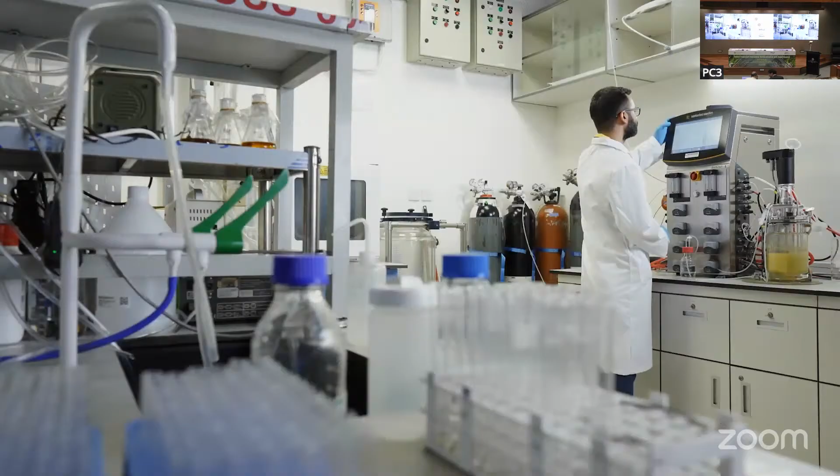PAIR is composed of multiple constituent research institutes and research centers. Each research unit focuses on a particular research area and is joined by researchers from various PolyU faculties, schools, and departments. PAIR research areas include advanced technologies and manufacturing, good health and well-being, and smart and sustainable cities.

PAIR researchers develop new materials, systems, technologies, and techniques that support industrial modernization, upgrading, and transformation. They look into the factors and mechanisms influencing human health and wellness and develop evidence-based solutions, and generate smart technology-based solutions for making urban operations and services more efficient, connected, and eco-friendly.

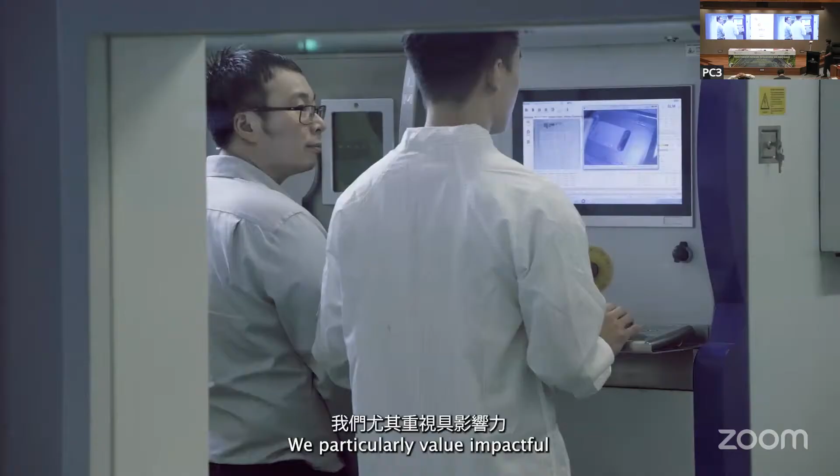We particularly value impactful collaborative activities in research and scholarship. PAIR researchers pursue research collaboration at different levels. In addition to interdisciplinary collaborations within and between research units, PAIR and its units establish partnerships with industries, governmental bodies, universities, and other external stakeholders.

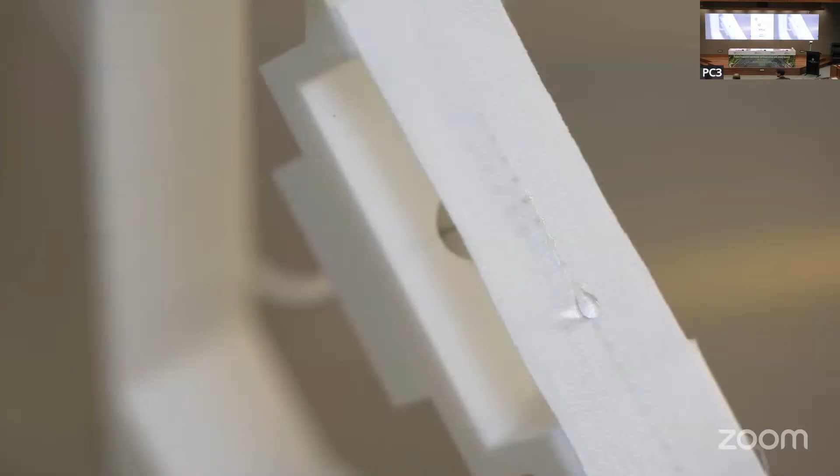With internal and external collaborations, we have successfully translated PAIR-led innovations into commercializable solutions and practical applications, and established joint laboratories and research entities with external organizations, driving scientific breakthroughs, innovation and technology development, and socioeconomic prosperity.

PAIR's research excellence and research impact have been widely recognized at local, regional, and international levels. Our research outcomes have been published in leading journals, including Nature and Science. Innovations led by PAIR researchers have won prizes at various competitions and events, including the International Exhibition of Inventions Geneva.

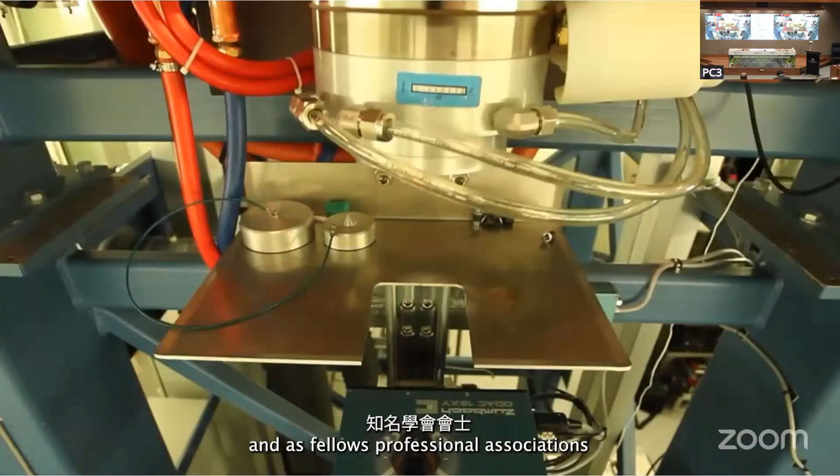Many PAIR researchers have been named among the world's top 2% most cited scientists in their own areas of specialty. Individual researchers have been selected to the National Academies of Science or Engineering and as fellows of professional associations, and have been bestowed with local, national, and international awards and honors.

Harnessing the strengths of PolyU's research and world-class scholars, PAIR will continue our unwavering efforts in research and scholarship, knowledge transfer, and collaboration to develop impactful solutions that benefit Hong Kong, the nation, and the world.

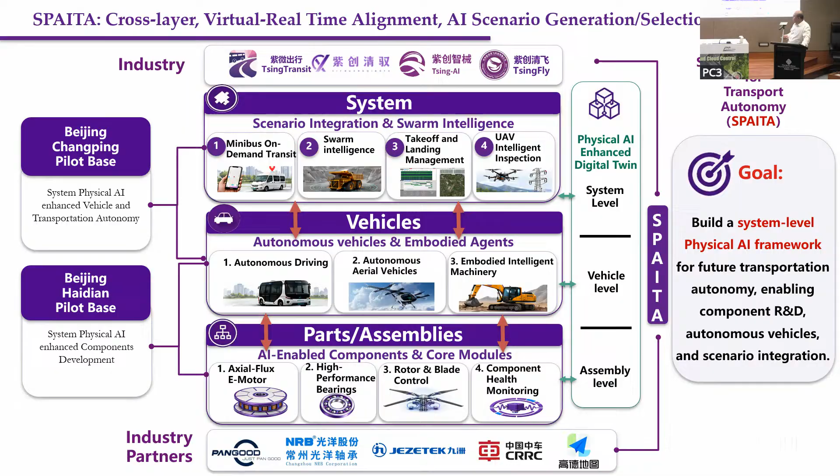And that's a single vehicle level. If we have multiple vehicles working together, that's swarm intelligence, that's the system level. This is the logic for the research group, the theme of the research group.

Back to today's topic, I will start with a more general picture regarding the most fundamental problem of urban mobility system. The most fundamental problem is the asymmetry or imbalance between the demand and supply.

Because demand is changing all the time, we have morning peak hour with a lot of traffic, afternoon peak hour, and low demand period during night. But supply will be provided by infrastructure plus a combination of infrastructure, cloud, and the vehicles.

So during the morning peak, there's a lot of traffic. If we want to accommodate that traffic, and if cloud computing is not enough, we can allocate more resources, more computing resources during the morning peak. That's not a problem. If we are lacking vehicles, we can allocate more vehicles because a lot of vehicles are currently parking in the car parks.

But for the infrastructure, it's rigid. There is nothing we can do. During the morning peak, we need 5 traffic lanes to accommodate the traffic, but that's not possible. If you have 2 traffic lanes, that's 2 traffic lanes - it's not possible to convert them in real time to 5 traffic lanes.

So accordingly... page 5 or page 6? Yeah.

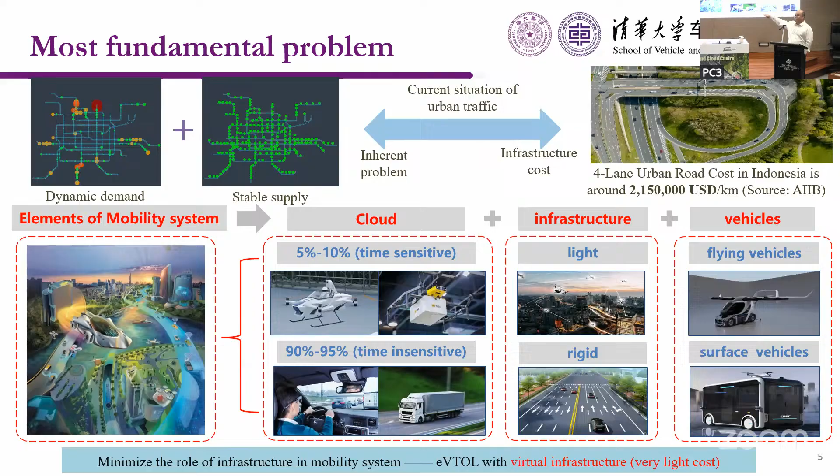Accordingly, throughout the past 30, 40 years of intelligent transportation systems, what we are going to do is minimize the role of infrastructure and enhance the role of cloud and vehicles. Over the past 20, 30 years of intelligent transportation system development, we always wish to minimize the role of infrastructure because infrastructure is rigid, and we want to enhance the role of vehicles and the cloud.

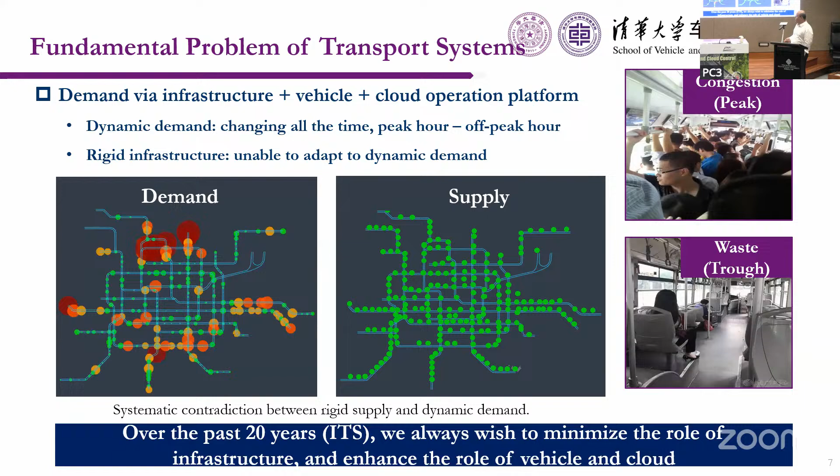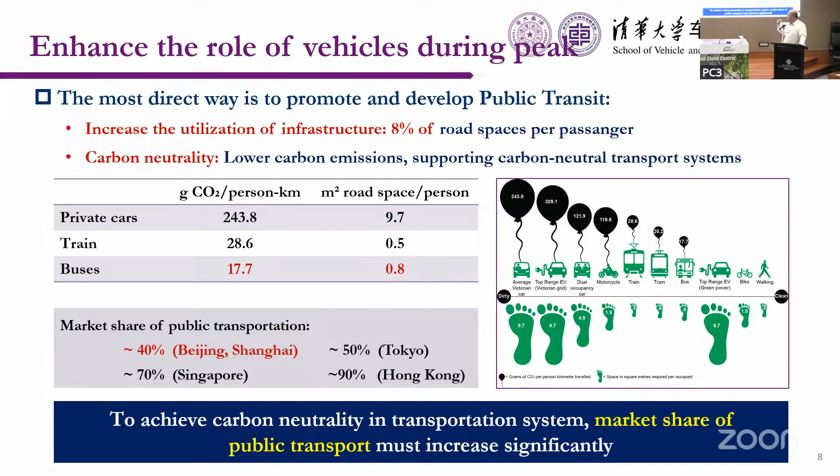But our current public transport system suffers from a few drawbacks. Number one is a very long journey time, because we need to stop at each and every station, even if nobody is alighting or boarding. And in order to cover a big range of area, we increase the nonlinear coefficient of the bus route.

The second issue is transfer. According to our data in Beijing, 41% of trips need a transfer to complete the journey. And for each transfer, it takes an average of 11 minutes, because for the transfer you need to stop, get off, maybe change to another platform, and wait for the connecting bus - a long and uncertain time. So accordingly, we need to improve the current practice in order to increase the market share.

Basically, what we are doing for the first study is to develop a smart brain, the cloud system, in order to have the benefit of both traditional public transport and also the ride sourcing platform. Our best hope is to have a transportation mode with a travel time similar to a taxi, point-to-point, while its cost, carbon rate, and burden to infrastructure is comparable to a traditional bus, by using a smart cloud operational platform.

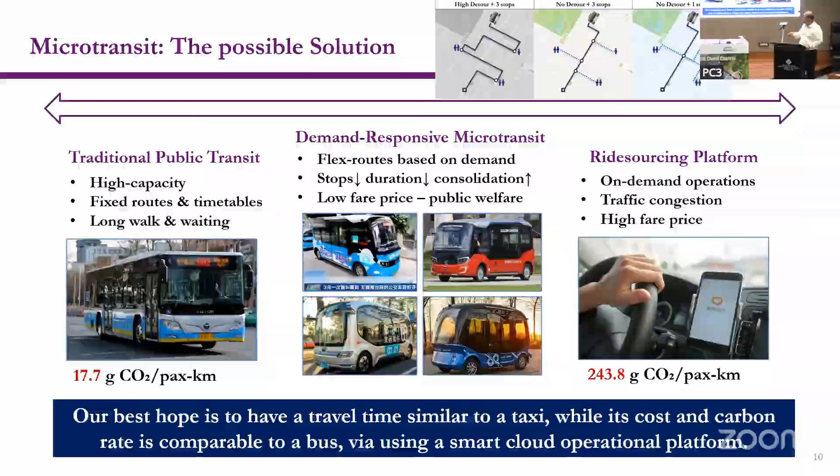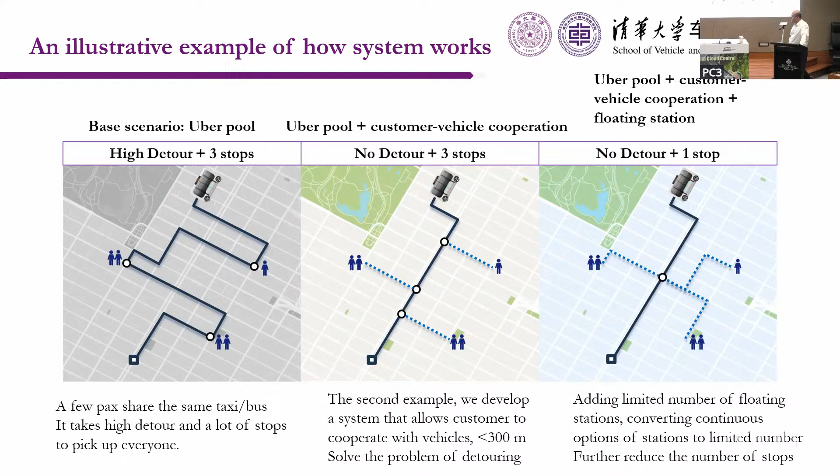The second idea is to allocate floating stations to gather passengers nearby in order to minimize the number of stops from 3 to 1, based on this example.

There are three components of this demand responsive microtransit. Module one is network design: how many floating stations in a zone and the optimal locations of each floating station. Floating station means you can only board and alight at any of those floating stations.

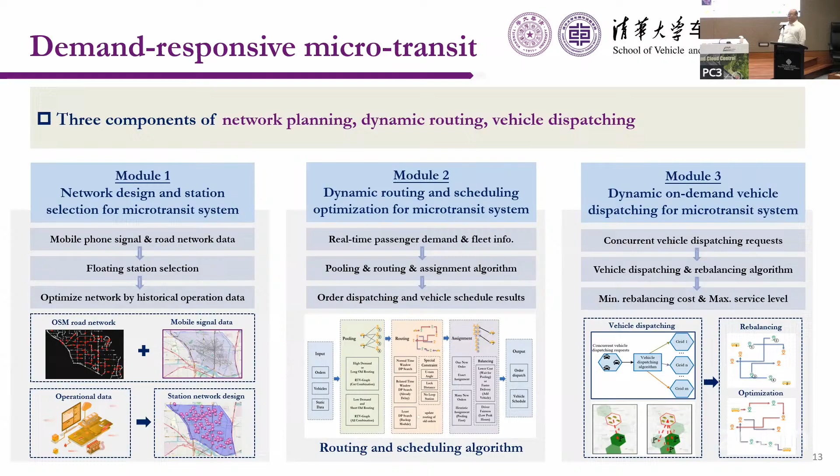The first one is vehicle customer coordination. We allow the customer to walk a little bit to the floating station, and based on the optimal calculation, the optimization, we allocate the second one, the dynamic flexible routing for each and every journey.

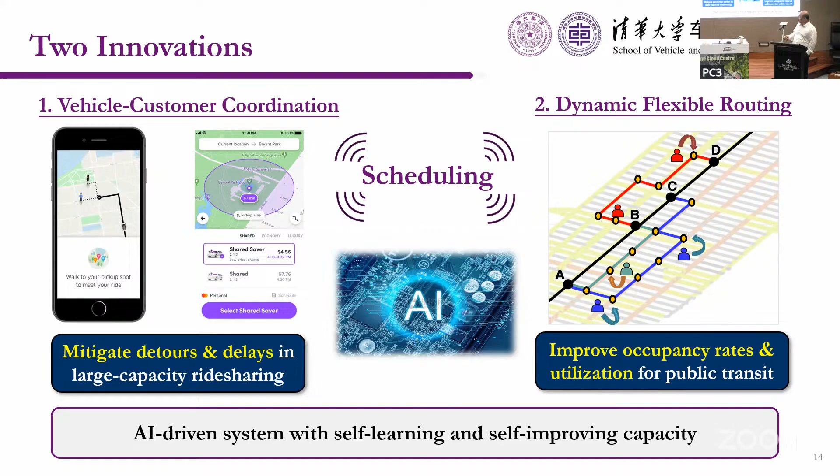For the user end, we submit the request, the origin or destination, final destination, or current location. On the driver end, we have the optimal plan, locationing information, speed information, and vehicle dynamic information sent to the cloud, so the smart brain can calculate the best possible route, position, and passenger route from their current location to the floating station.

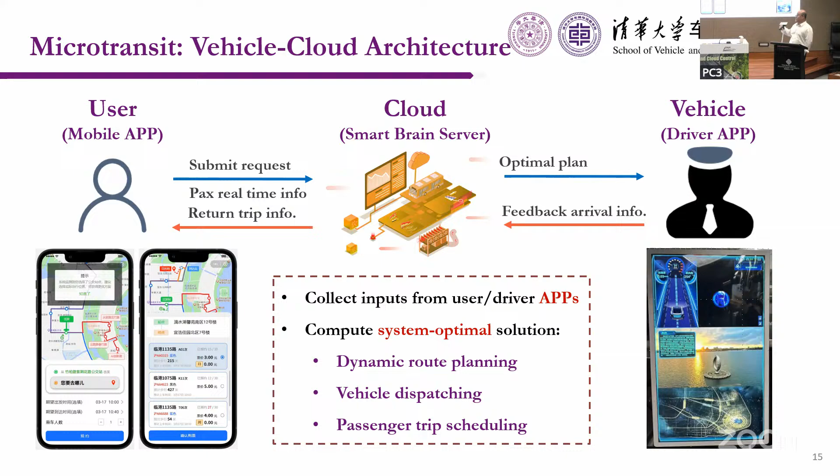The logical architecture has interfaces between the user end, smart brain, and the driver end. From smart brain, we develop the user app and the vehicle app.

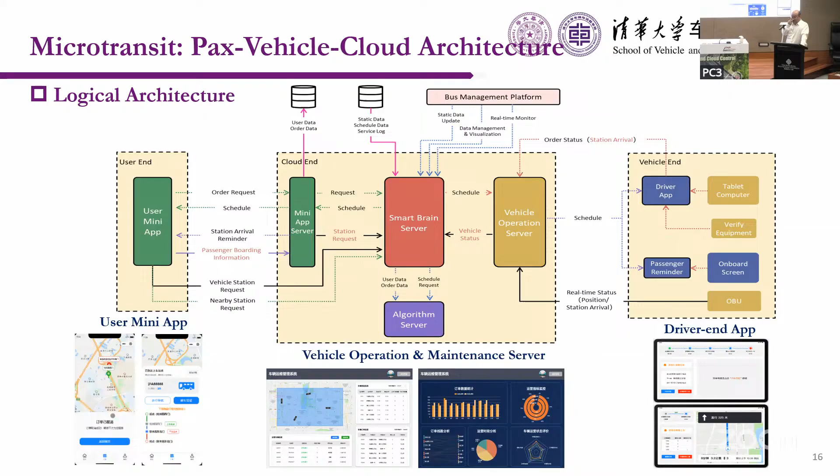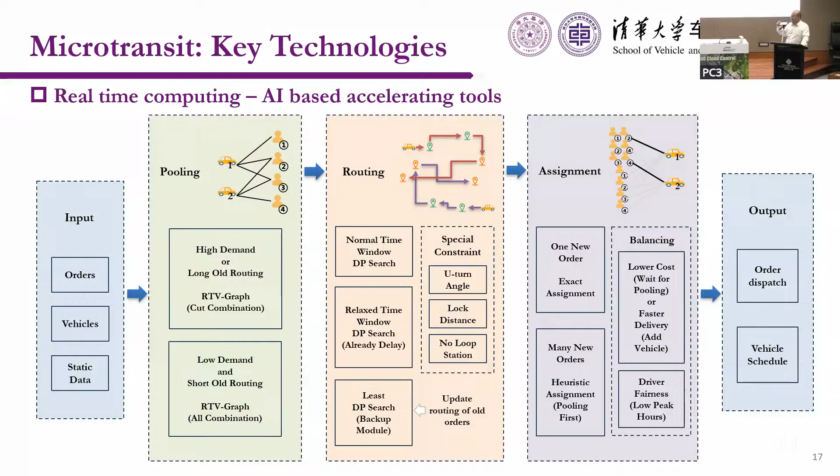We use a lot of AI tools to accelerate the calculation because this is a very complicated problem. We have a lot of pre-training in order to get calculation results in real time.

We developed the algorithm in collaboration with Professor Wang. It's a large-scale online optimization problem. We reduced the computation time to only 5% in comparison to the commercial solvers.

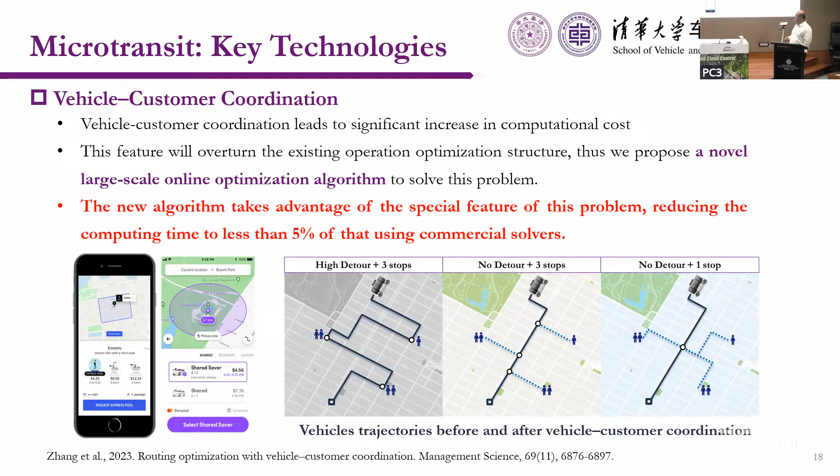At the end, every 10 seconds we can update the plan, and every 1 second we have the calculation result, which allows real-time computation.

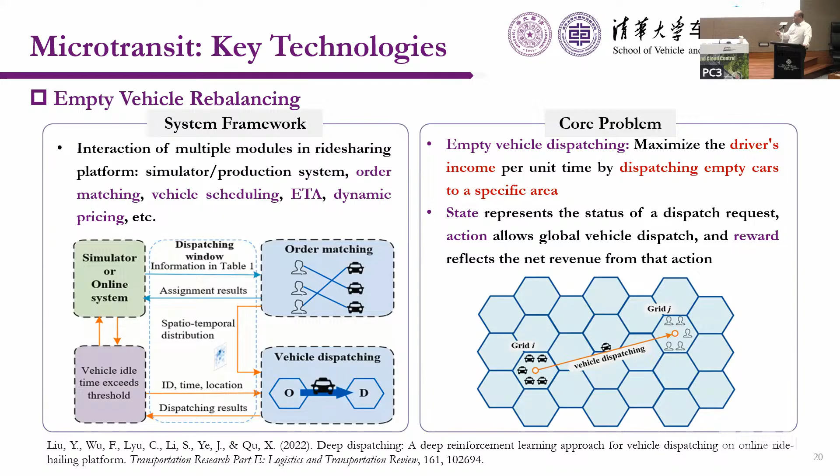And this is the optimal redeployment from one zone to another zone problem. Basically, the system has been deployed in Zhuzhou City, Hunan Province, for the first place. It has been running for 18 months already.

In the past 6 months, we collected data to evaluate the performance. Basically, our demand responsive public transport system's travel time is only 20%, 21% higher in comparison to a taxi, from floating station to another floating station. Only 21% higher, that is comparable to a ride-sourcing system.

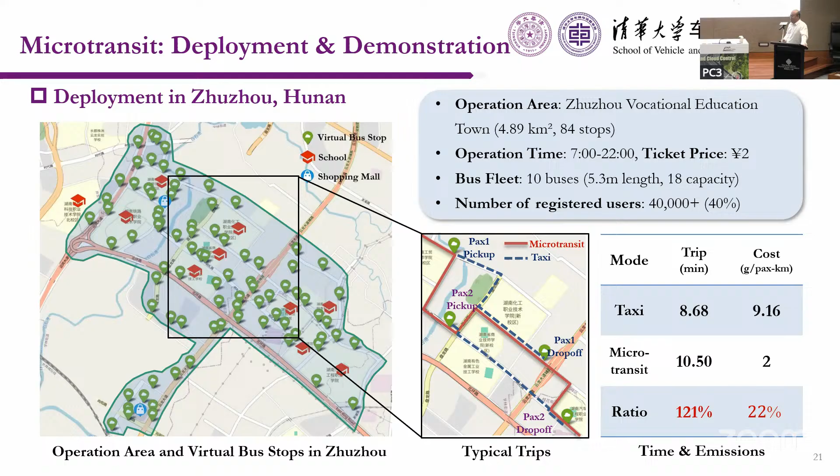But the cost by using taxi is 9.16 Chinese yuan, and we only collect 2 Chinese yuan, it's only 20%. If you calculate the carbon footprint and the burden to infrastructure, we are much lower, like 20% or even less.

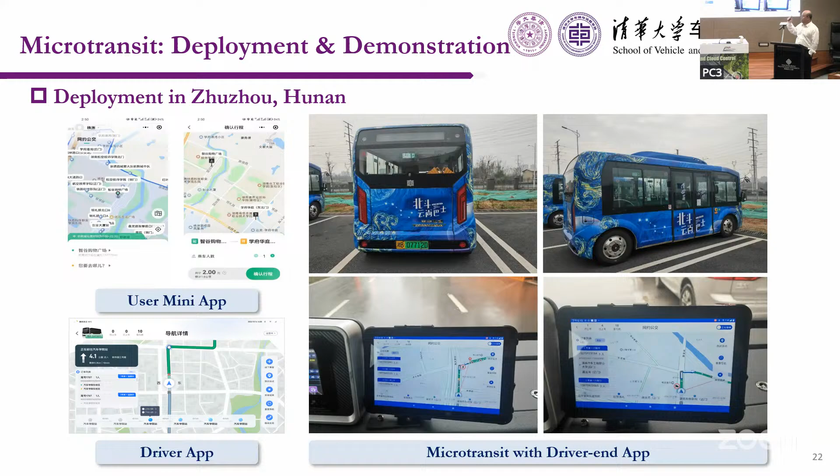We are using buses manufactured by CRRC, one of the largest vehicle and bus van manufacturers in the world. We developed the user app, the driver app, and we use Beidou for positioning purposes.

Because we have a strong benefit in cost, with cost benefit and travel time comparable accordingly, we gain a substantial amount of market share from the taxi industry.

According to our real data for this demonstration zone, the number of DiDi and AMAP services has reduced by 40% after launch of our system, and the daily revenue has increased.

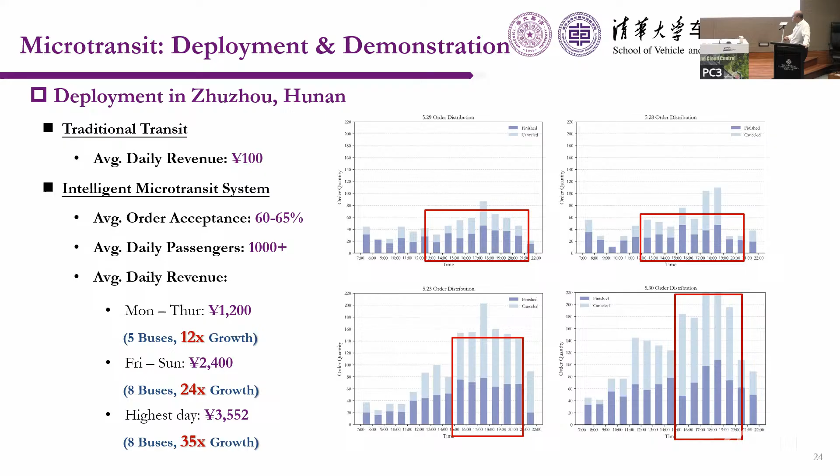Daily revenue increased 12 times during the weekday, 24 times during the weekend, and the highest day 35 times, which allows a positive business model for the public transport operators.

After that, we have been deployed in another 5 cities in China, and in the following year, in collaboration with King Long, Xiamen King Long bus manufacturer, and also CRRC, we are going to deploy in another 20 cities.

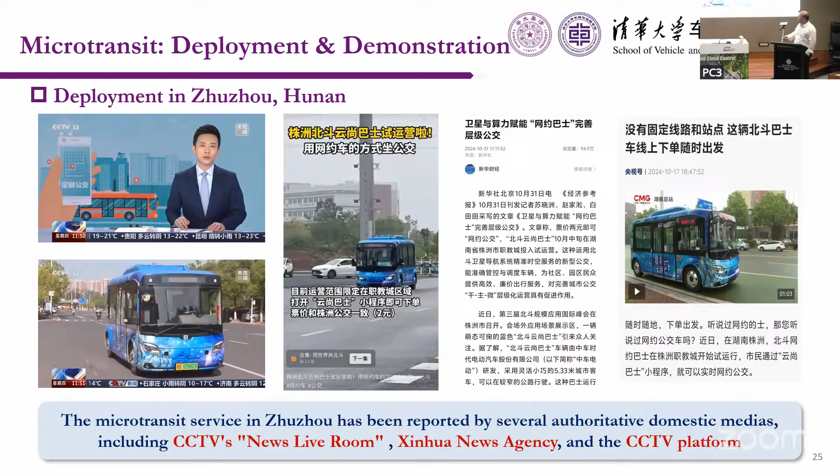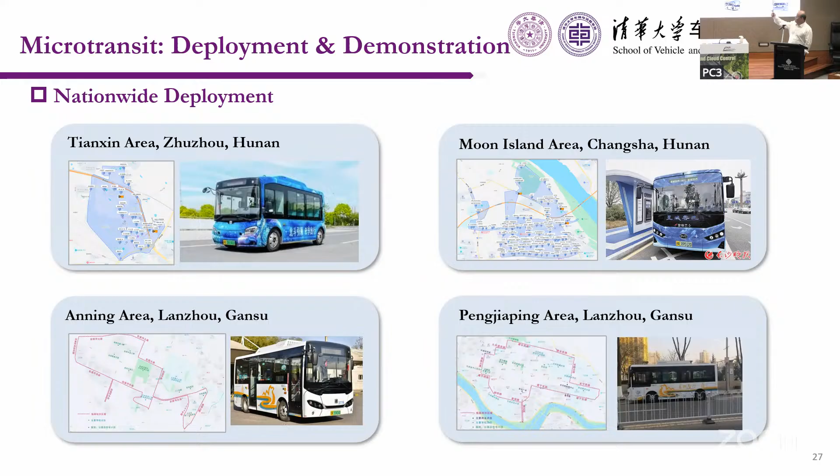It was reported by CCTV and a few domestic news outlets. Several other places have been launched in the past 6 months - this is number 2, number 3, number 4, number 6, and number 5.

Okay, for the first case study, basically what we are doing is to increase the role of cloud.

So remember, for the mobility system, the supply will be provided by infrastructure, cloud, and vehicles. For the first case study, we increased the role of cloud in order to make our transportation system better.

The second case study, we are going to use autonomous driving technologies to develop new types of vehicles. It's something in between passenger vehicles, or a minibus, and a train, in order to enjoy the benefit of both and increase our capacity. The second example, we are developing new types of vehicles.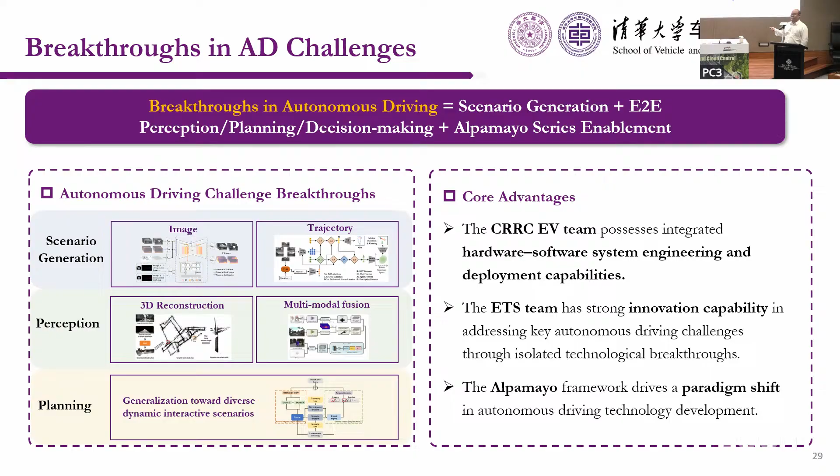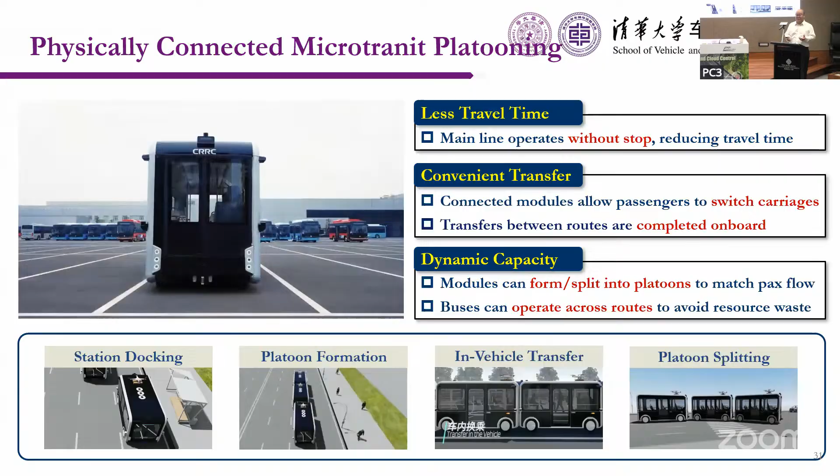We have done a lot of work for autonomous driving based on scenario generation and end-to-end vision language action models. In that process, we developed a technology for very precise control. We allow the vehicles to be connected and disconnected while in motion, like what we have done for this vehicle, the first three ones.

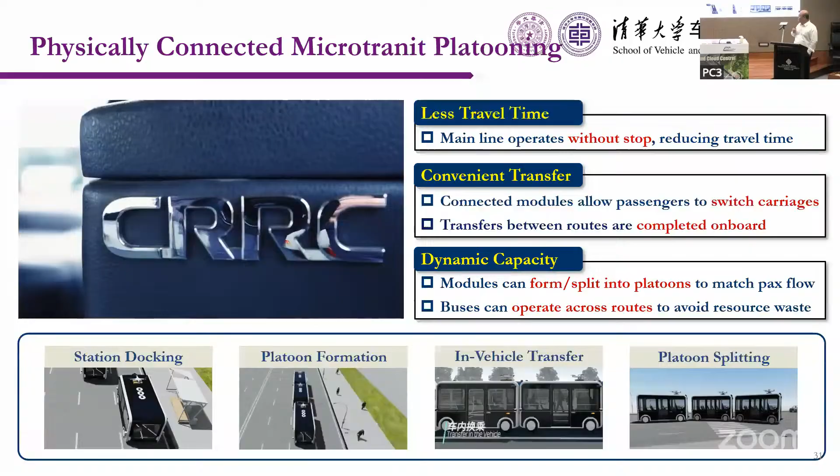This is also a collaboration with CRRC. Basically, the vehicles can be connected while in motion, and disconnected while in motion. Accordingly, if somebody wants to get off, you can transfer to the last cabin by using the autonomous driving technology to get rid of the last cabin.

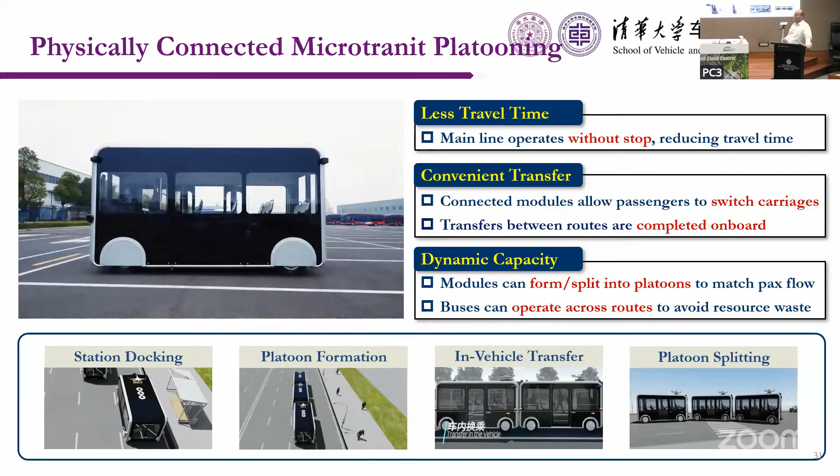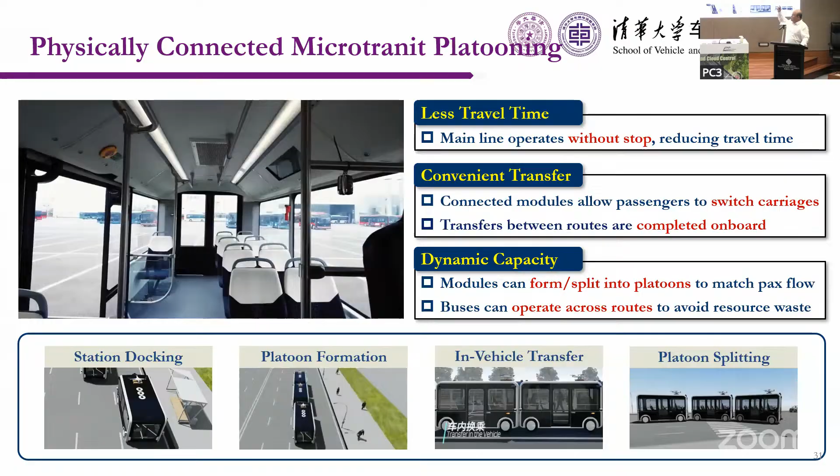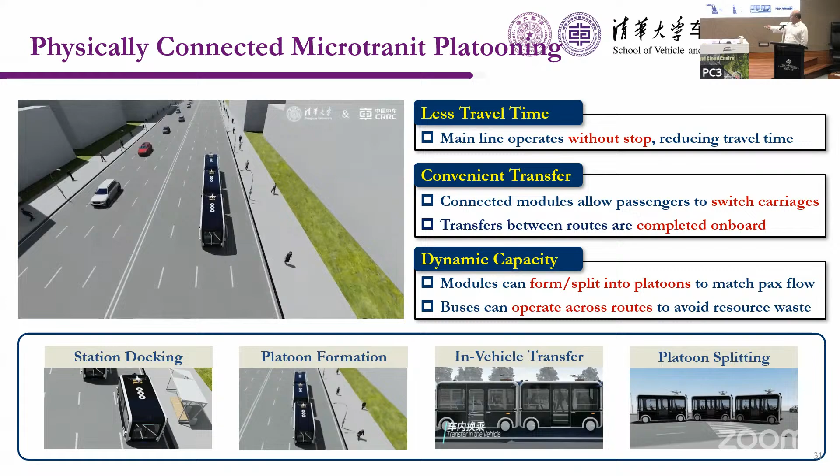The last cabin can use the demand responsive model, as I introduced just now, to distribute and collect new passengers. Accordingly, from one zone to another, you never need to stop. It's a train system, you never need to stop. Only if somebody arrives near the final destination do you transfer to the last cabin, then get rid of it using the demand responsive technology to distribute passengers and collect new ones. This is like what this diagram is showing.

From origin to destination, only the first several kilometers and the last several kilometers have some stops. Anything in between, never stop. When you arrive at your final destination, you transfer all the alighting passengers to the last cabin using autonomous driving technologies, get rid of the last cabin, and use the demand responsive model to distribute those passengers alighting and boarding.

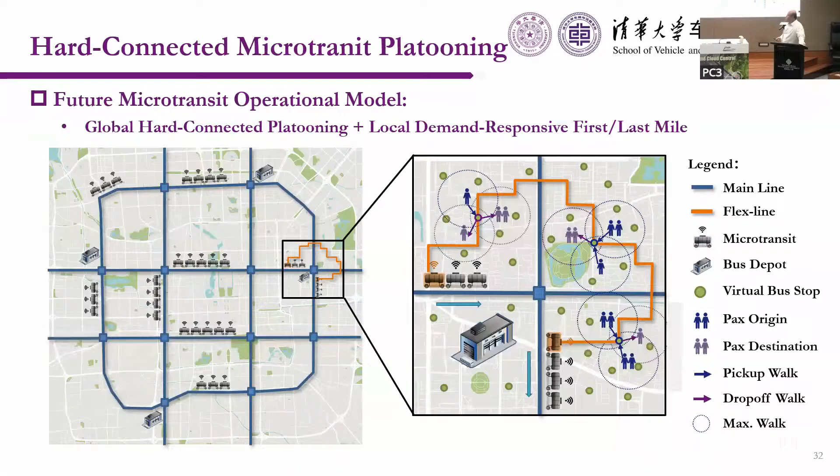You can use the demand responsive model to calculate the floating stations, so you only need to stop 3 times. The first time, 3 passengers get off and 1 boards. At the second floating station, 2 alighting passengers and 3 boarding. At the third floating station, 1 alighting passenger and 4 boarding. As soon as you collect all those passengers, you arrive at the main corridor and connect to the train system.

So the second example is basically we develop new types of vehicles for increasing future infrastructure capacity. Accordingly, the role of vehicles will be enhanced, and the relative role of infrastructure will be minimized.

So the third example is basically the ultimate solution. As I introduced just now, we have an urban mobility system where the supply is provided by cloud, infrastructure, and vehicles. We want to minimize the role of infrastructure. So which type of transportation mode has the lowest requirement for infrastructure?

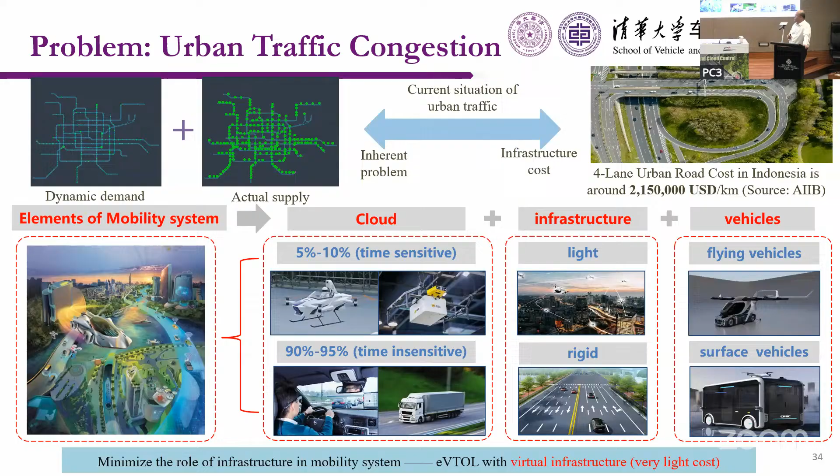That's flying, right? Because for flying, it's a route from one location to another, we do not need to construct physical infrastructure, we only need a virtual route, an air route. So accordingly, urban aerial mobility leverages virtual air route networks to reshape resource allocation, overcoming the physical constraints of traditional infrastructure.

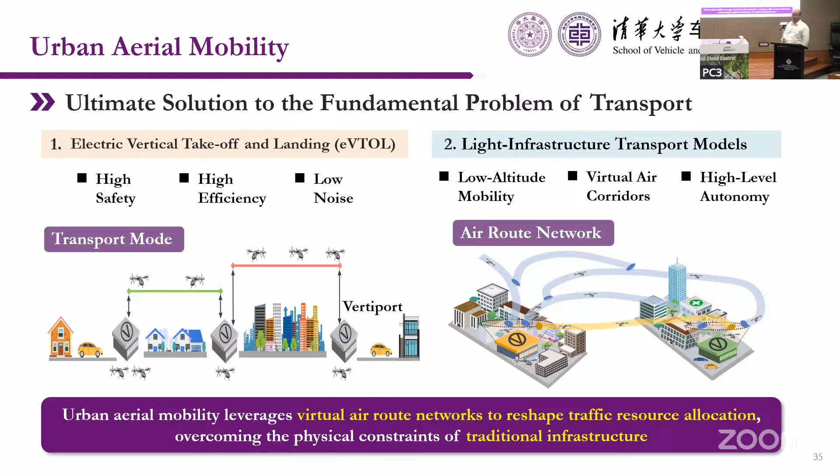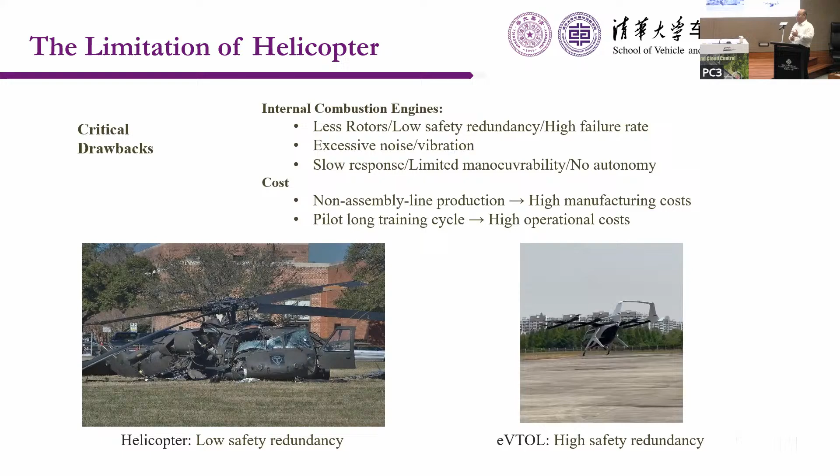However, low altitude flying is not new. In 1939, we already had helicopters, but helicopters never became a mainstream choice for commuting. At the moment in China, such a large country, we only have 800 civilian-used helicopters. Why only 800? It's not an industry at all.

Why? Because you only have 1 propeller, you only have 1 engine. So the reliability level needs to be as high as 10 to the power minus 7, 10 to the power minus 8. You only have 1 propeller, 1 engine, so the system reliability equals the parts reliability.

Thanks to the recent development of electric vehicles, we now have distributed control. Take a look at our flying vehicle. For this example, we have 8 rotors. For each rotor, we have 1 electronic motor, and they are running independently, with distributed control.

Accordingly, even if one of them is not working—you see the second row, the third one is not working right now, I turn it off—we can still maintain stability and safe landing. Accordingly, there is a big difference between the parts reliability and the system reliability.

So accordingly, if we can accommodate two malfunctions, that means the reliability level for the rotor for the electronic motor can be reduced from 10 to the power minus 7 to 10 to the power minus 3. That's vehicle level, that's a surface vehicle level, not the aircraft level.

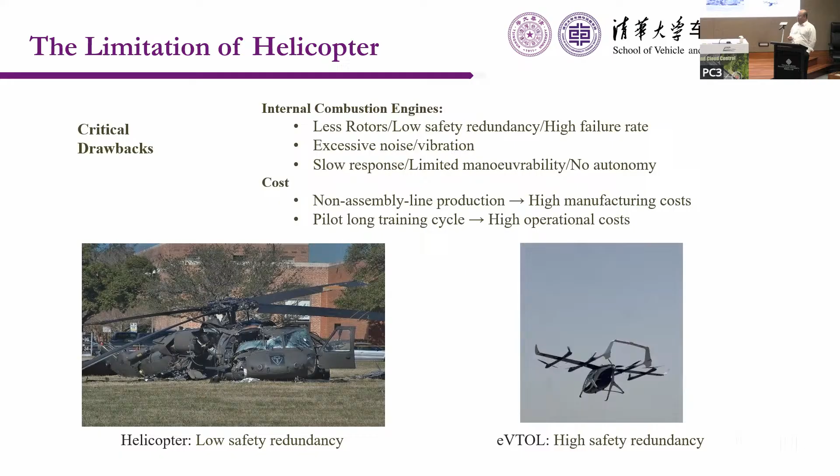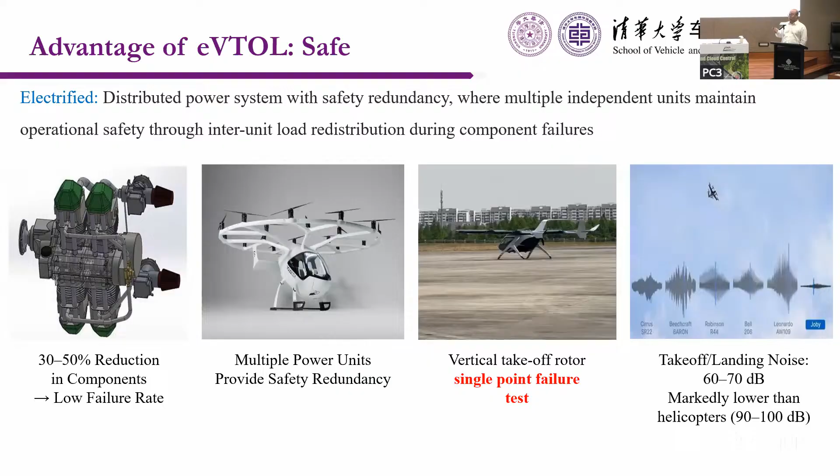If we can use the supply chain system of electrical vehicles, the cost will be much lower, only 5%, 1/20th of an aircraft or a helicopter. Because we have electrified distributed control, we can use the supply chain of the vehicle industry to significantly reduce the cost to only 5% of a helicopter.

According to the estimation by BCG and Roland Berger, for two-seater or three-seater flying vehicles, the cost will be reduced to $200,000 to $300,000 US, or according to other estimation, 500,000 to 1 million Chinese yuan per flying vehicle, if we use the supply chain of electrical vehicles and assembly lines instead of customized design.

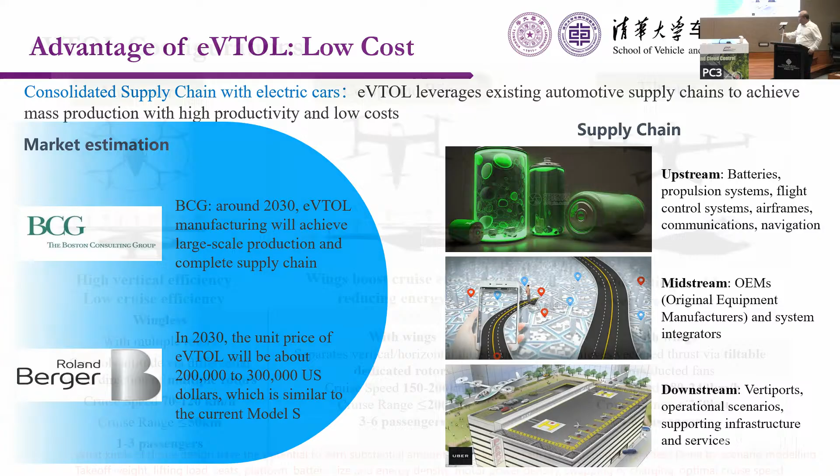However, at the moment we have over 800 different configurations of flying vehicles in the world, and in the end we may only have 5 or 6 that can be useful for our current market. How do we convert the 800 different configurations to 5 or 6? What kind of drone design or flying vehicle design has the potential to gain substantial market share from our surface commuting services?

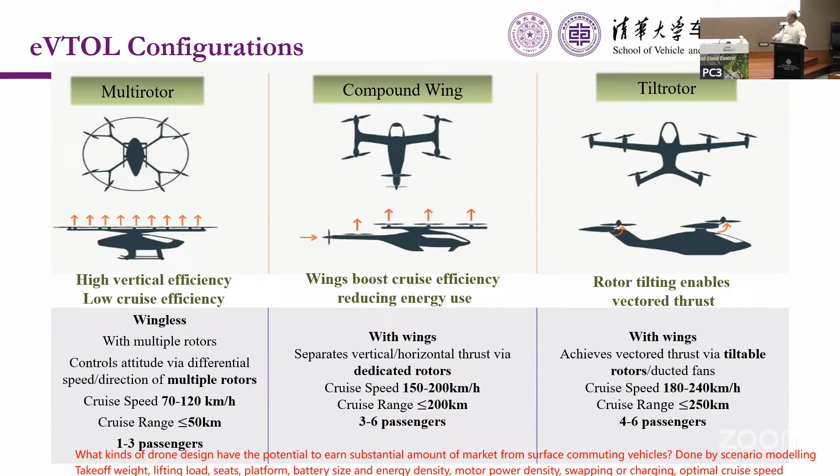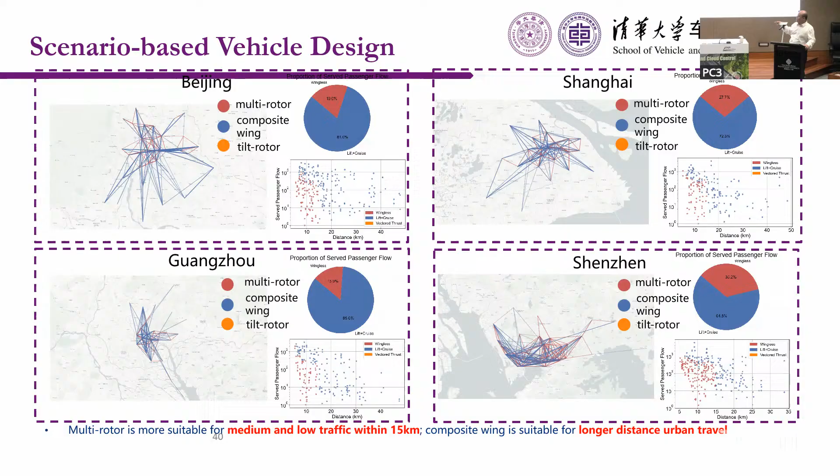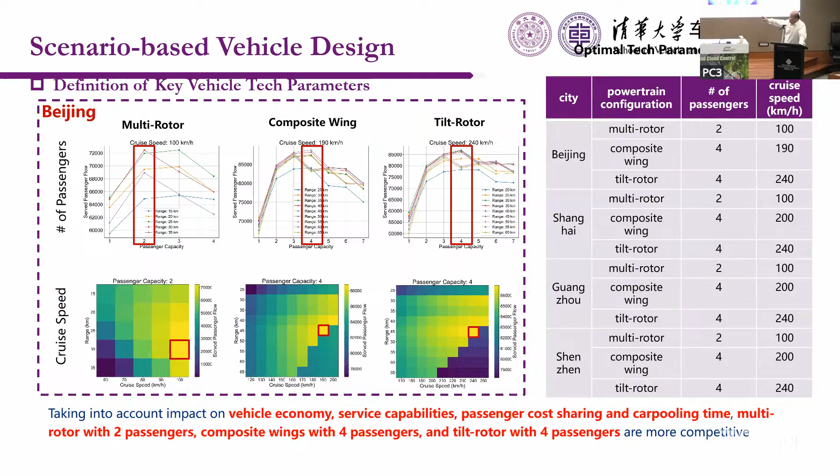We have different configurations: multi-rotor, compound wing, tilt rotor, and the lifting capacity, cruise speed, all the design parameters under different configurations, to determine what the optimal configuration is.

We also conducted a study of the Guangdong, Hong Kong, Macau Bay Area. As we all know, we have 5 large airports in this small area, and 13 large train stations, but the connectivity between different interchanges is not good enough. It is very rare for somebody to arrive at Shenzhen Airport and go to Nansha North for connecting trains.

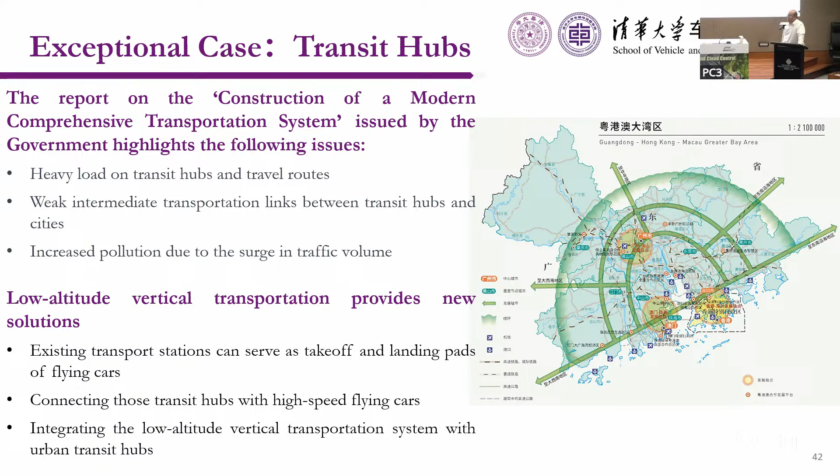If we can connect all those interchanges using different types of flying vehicles: if the distance is short, use the multi-rotor; if the distance is 25 to 70 or 80, use a compound wing; and if the distance is long enough, like 100 kilometers between Guangzhou and Shenzhen, use the tilt rotor. We can reduce the travel time from roughly 2 hours to 15 minutes.

If the travel time from one interchange to another is 15 minutes, that's like different terminals in the same airport, so the connectivity will be much, much better, and it will certainly boost the economy. It is possible to integrate the vertical transportation system with the traditional hubs.

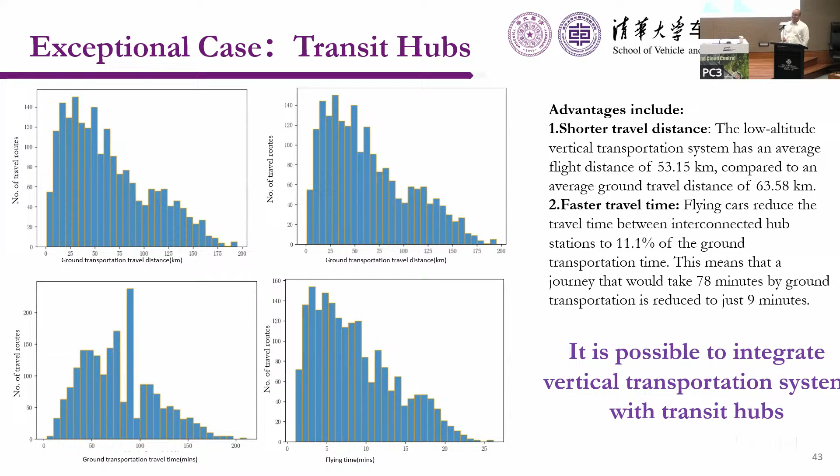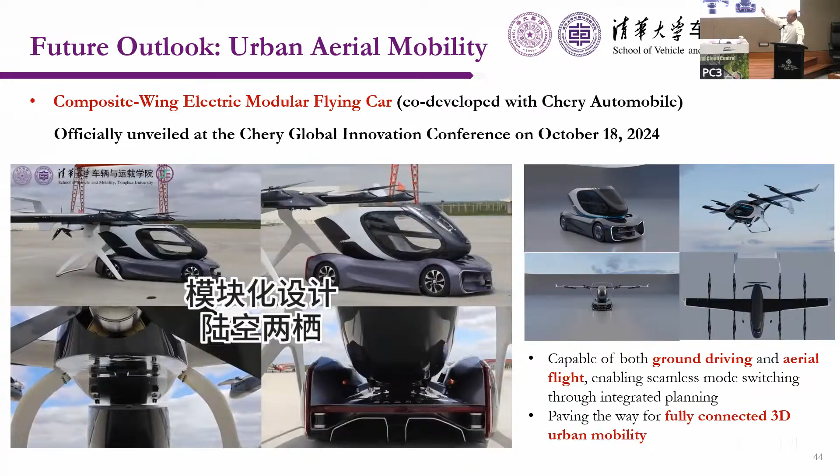It's a modularized design. We have three components: the composite wing at A, the intelligent cockpit at B, and the self-driving chassis at C. A plus B is the airplane. B plus C is the self-driving vehicle.

And this is the operational mode, also demand responsive. The audio is not on, right? So I can introduce it — it's also a demand responsive model.

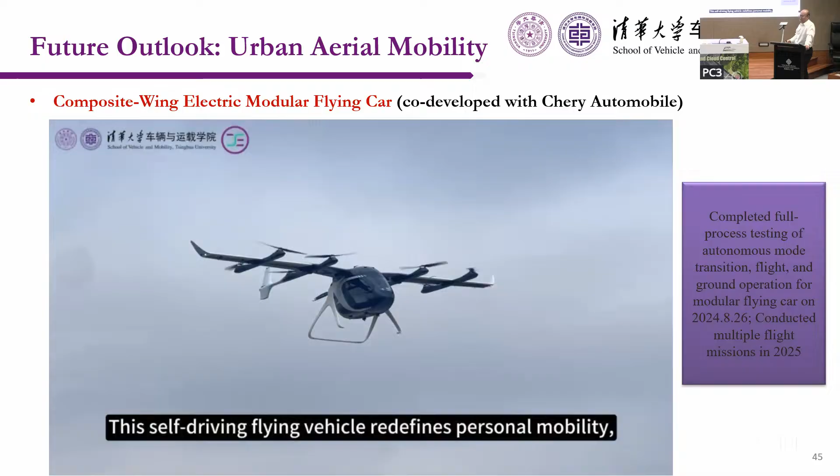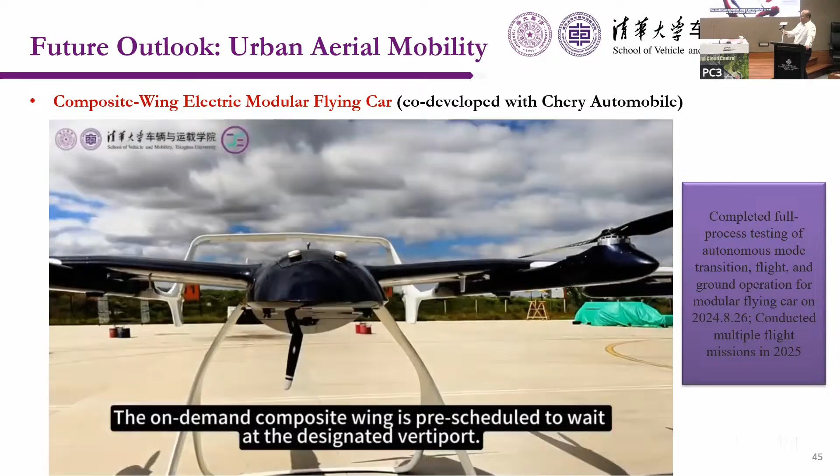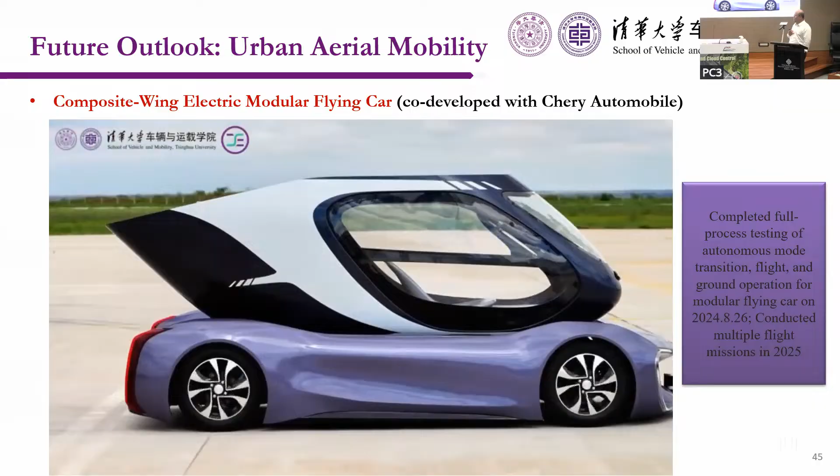Basically, you have a user app to order from your origin to your final location. From your origin to the nearest vertiport, we use land transport, using B plus C, the cockpit plus the chassis, self-driving from your home to the vertiport. As soon as you arrive at the vertiport near your home, you reverse into the compound wing, and then the self-driving chassis leaves. Now you have A plus B, the airplane, the flying vehicle.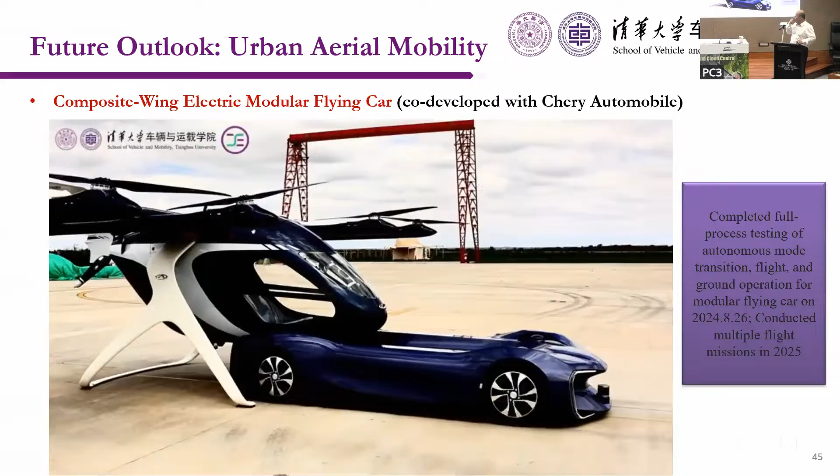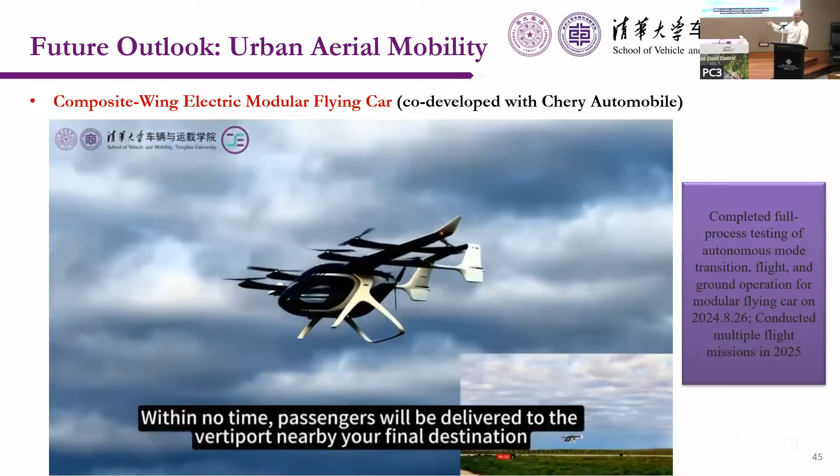It flies from the vertiport to the vertiport near your workplace, and it takes a very short time, like several minutes from one vertiport to another, because the speed can be as high as 150 kilometers per hour. Then you send another chassis to pick up the cockpit for the final mile delivery from the second vertiport to your workplace.

So this is the imagination for future.

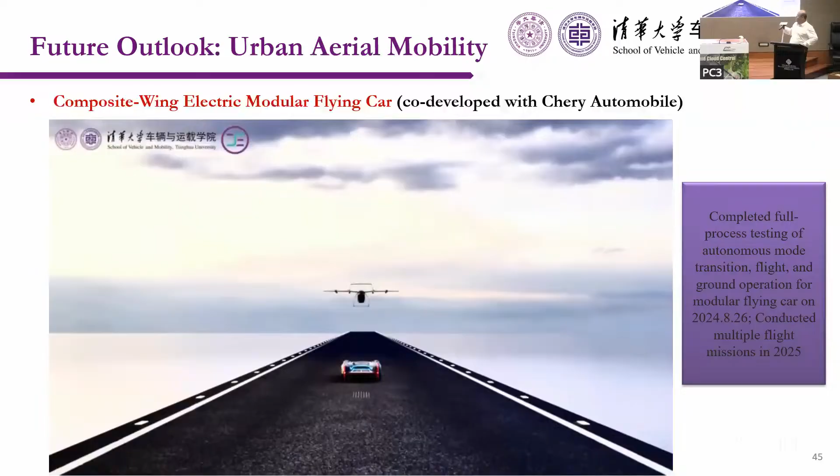For this product, we use a lot of digital twin or virtual physical testing processes to minimize the risk for physical experiments, and a lot of different tests, from summer to winter.

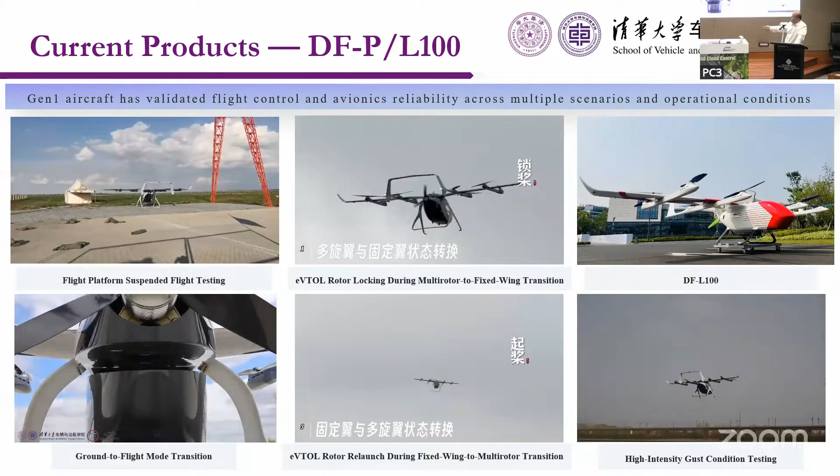And we developed... it takes time. It's stuck.

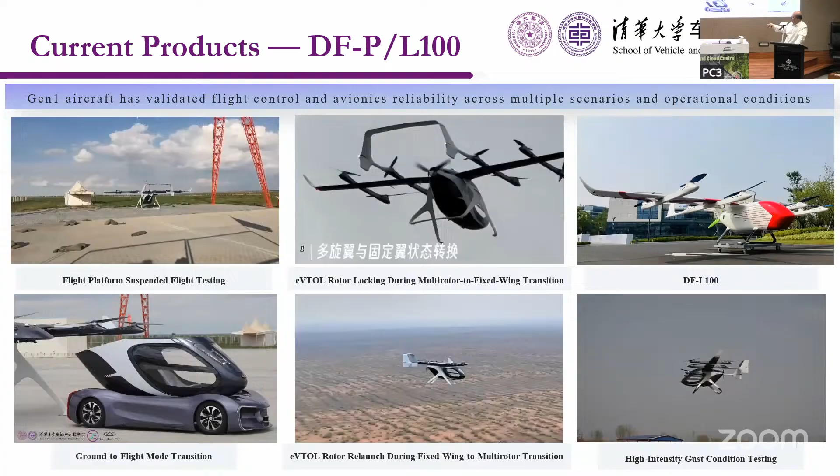We develop a physical AI or digital twin system to accelerate the research and development process, as I mentioned just now, from parts level to the vehicle level to the system level.

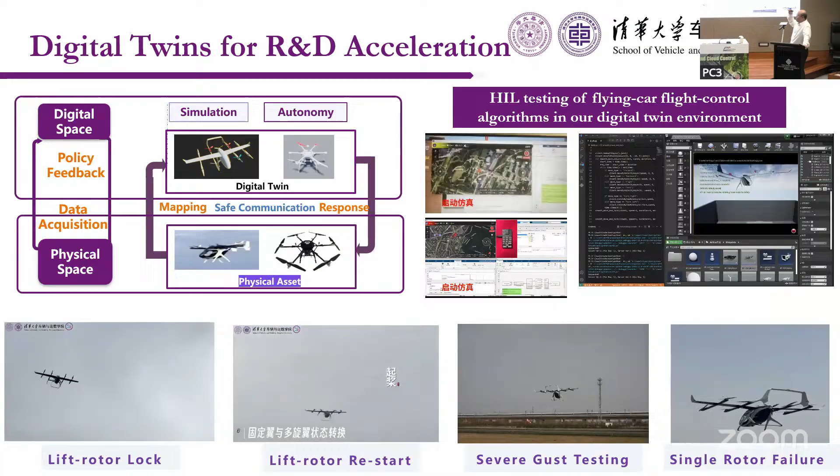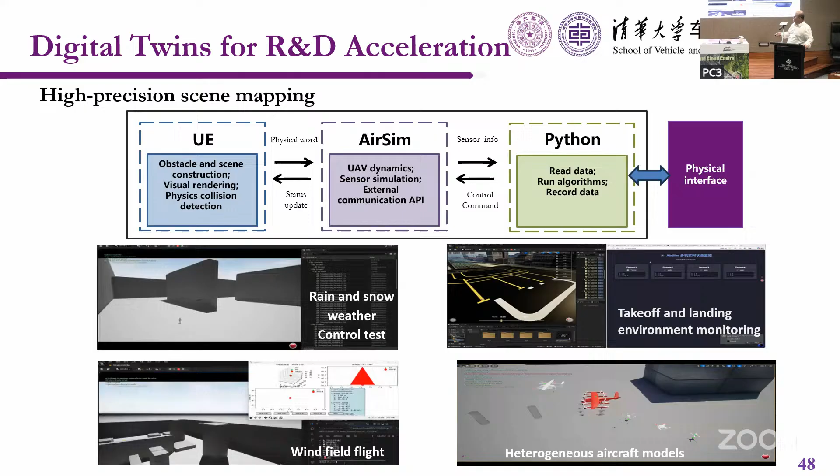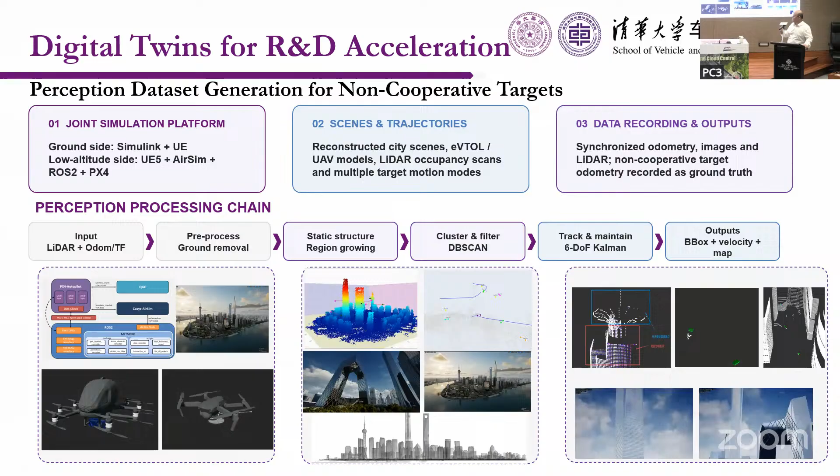We use UE, AirSim and Python to generate the environment, and we use a lot of AI tools to generate different scenarios, like different weather conditions, snow conditions, heavy wind conditions. We also generate non-cooperative targets, like drones and birds.

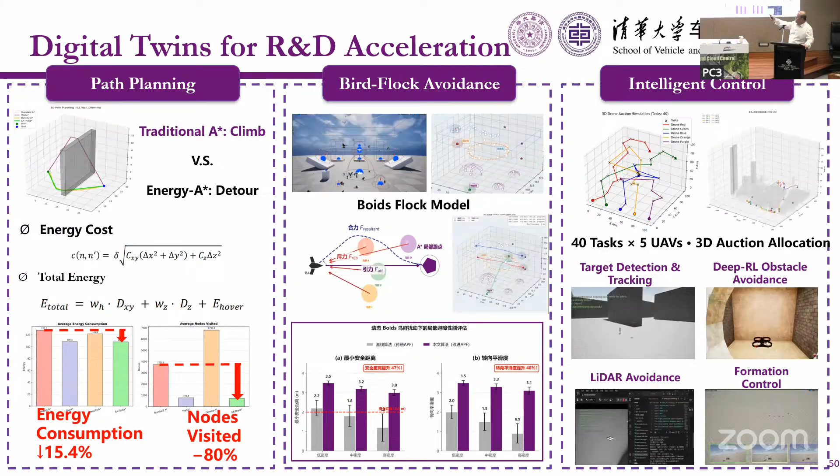And we generate different wind conditions.

This is another work at the system level, the terminal management system or the vertiport system. As we can imagine, in future at the vertiport, takeoff and landing will be the choke point for flying vehicles, with the highest density.

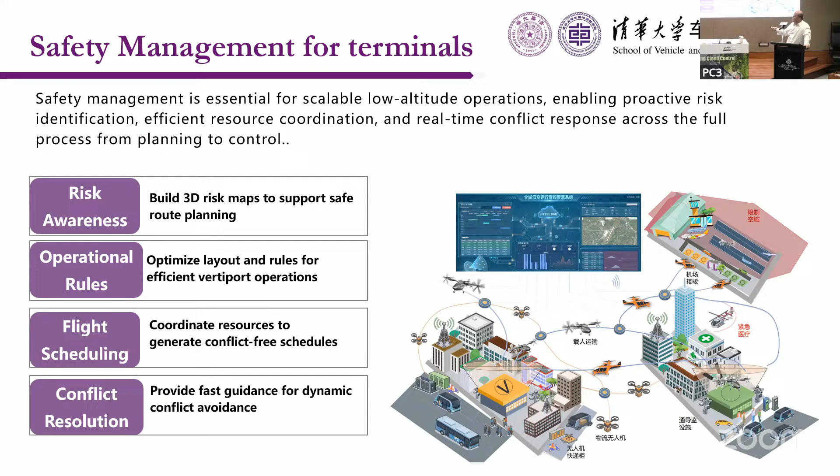Accordingly, we develop a safety management system for the terminals, and we consider the third-party risk on the ground, and we also consider the vertiport topology and operational rules.

So basically we simplify the current aviation process, from a 5-stage process down to only a 2-stage process in the terminal management of flying vehicles, in order to increase the capacity while maintaining the safety benefit.

This is the system that we developed for the terminal airspace management. It's like a choke point, similar to a traffic signal at signalized intersections.

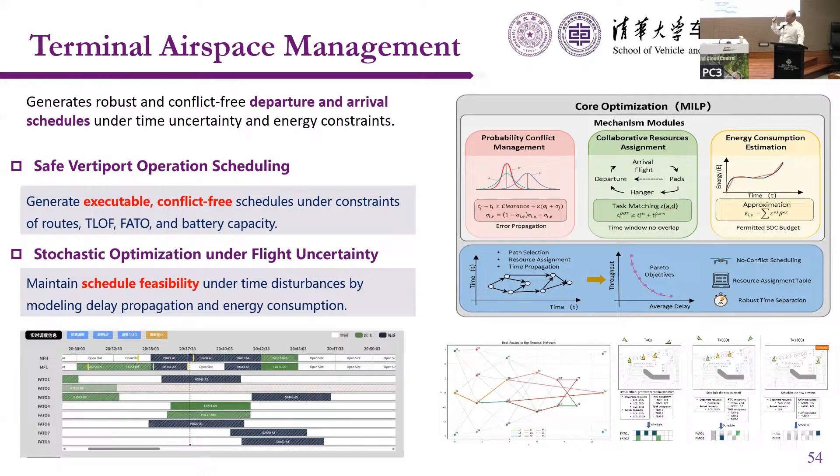We developed a system with green and black signals - that's the green signal and the red signal - in order to allow a vehicle to land and allow a vehicle to take off, or disallow the vehicle to land and take off.

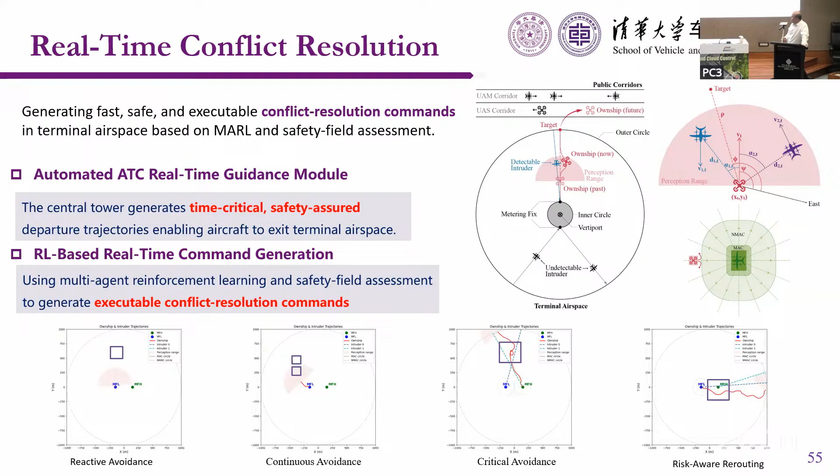In case we have some issues, we also developed real-time conflict resolution protocols to minimize the risk. The system has been implemented in a general aviation airport of Chongqing City.

The first one is a sandbox in our lab. The second one is a general aviation airport - we converted the general aviation airport in Chongqing into a flying vehicle validation or verification airport.

So there are videos you can watch - for the aircraft management, you can click the button, and the other three as well.

For the multi-vehicle takeoff and coordination, for the takeoff and landing test, and during the night environment, how to take off and land, how to communicate between different vehicles.

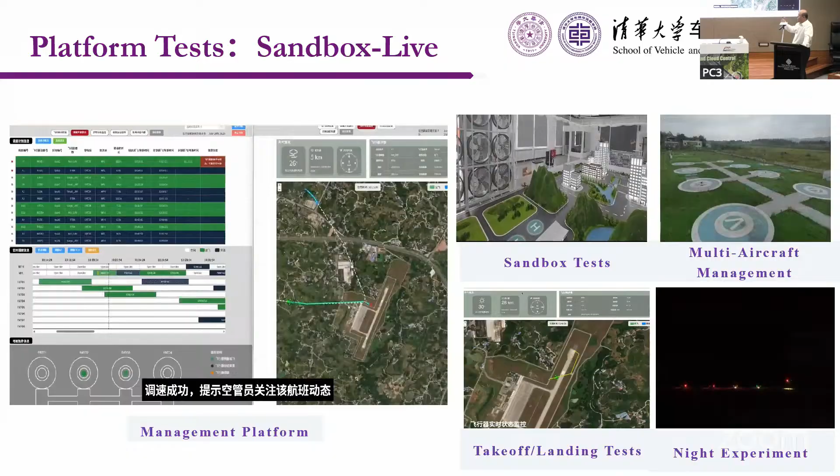And we propose three solutions. Number one is to increase the role of the cloud, to have a smart brain in order to better coordinate the vehicles - that's a kind of swarm intelligence, and that's what we have done in the past many years for intelligent transportation systems.

The second solution is to develop new types of vehicles - for example, autonomous driving, which allows the time distance between one vehicle and the successive vehicle to be only 1 second or even less.

That increases the capacity. But for this example, what we are proposing is to have physically connected platoons using an autonomous driving system, allowing vehicles to connect and disconnect via motion, in order to minimize or even reduce the number of stops to a very small number.

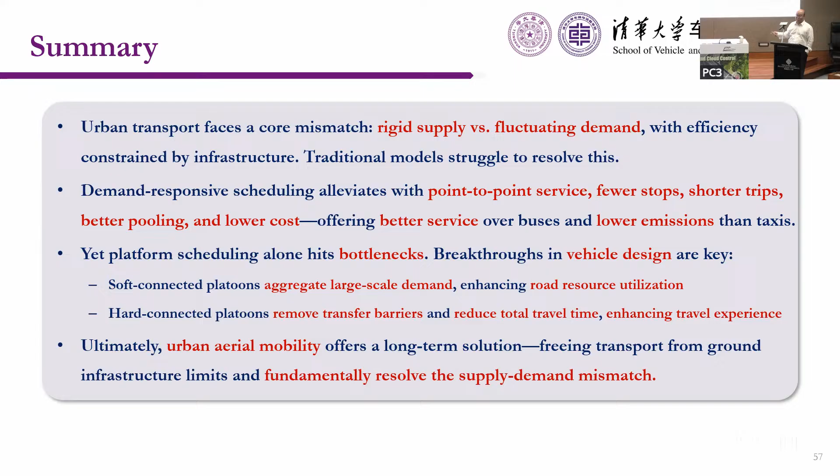At that time, we had been collaborating with Elsevier. And 2 years later, the journal was indexed by SCIE and SSCI with the highest impact factor in the category of transportation by Web of Science.

I think our first impact factor is 12, right? The first one is 12, and the second one is 14.5, and the third one for this year is 12.7.

The reason we have a reduction from 14.5 to 12.7 is we changed the platform. For the first 4 years we collaborated with Elsevier, and since this year we didn't renew the contract with Elsevier, and we go back to Tsinghua University Press to publish, as requested by the Ministry of Science and Technology, and also this is our willing as well.